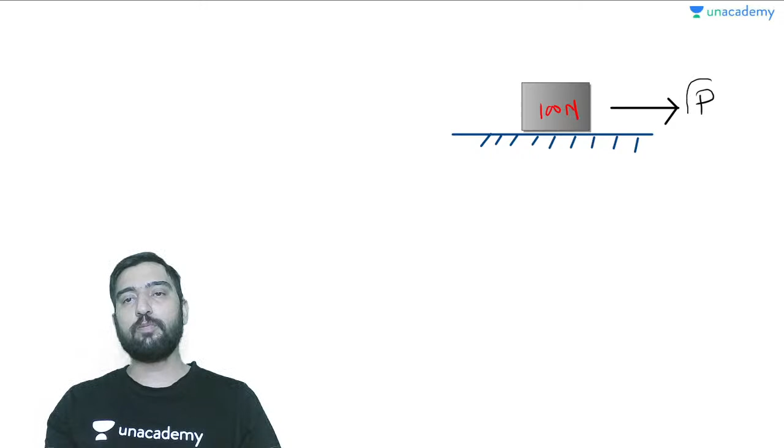Okay, so this force P is a function of two things. One, what is the weight of this block?

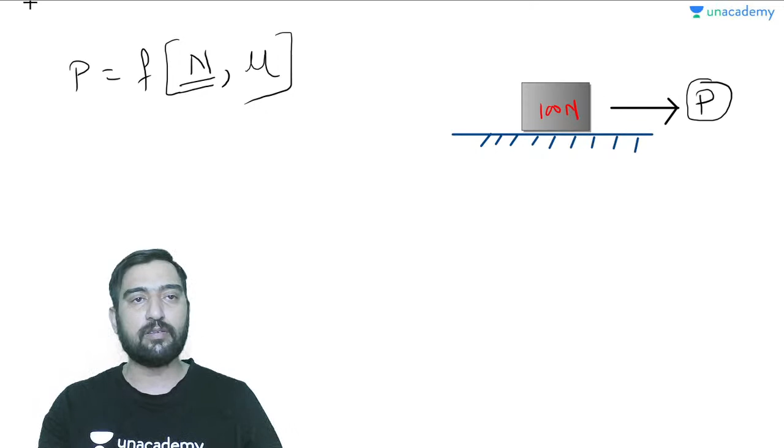So depending upon the type of surface, this P force is also varying. Depending upon the weight of this block, this P force is also affecting. So I can say that force required to move this block is going to depend upon two things. One is the normal force, another is the surface property, which you can say is the coefficient of friction between these surfaces. Is this clear?

It is the coefficient of friction.

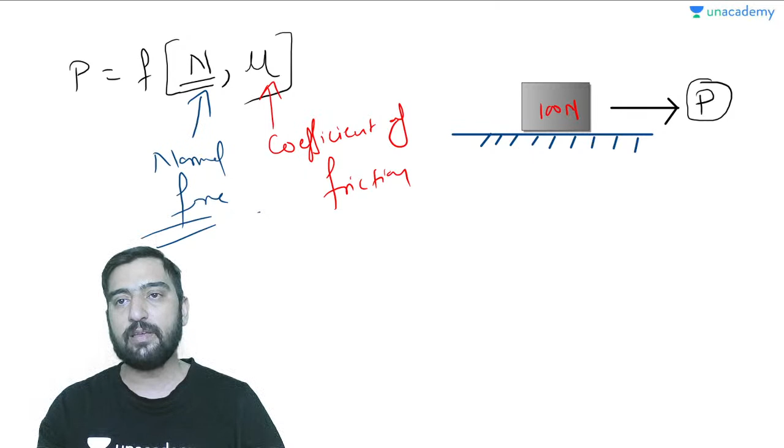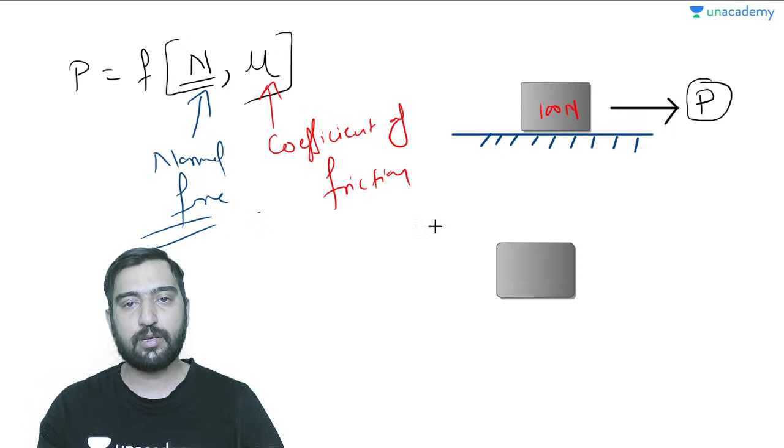Let me draw the free body diagram. Here, let's say this is my block. Okay, so here the weight of this block is 100 Newton. Okay, and a normal force would be acting here. In this case, when the plane is horizontal, the normal force is nothing but equal to the weight of the block. So depending upon this, there would be an equal and opposite force, or you can say there would be a resisting force developing, and that resistant force is the frictional force. And this P is your action force.

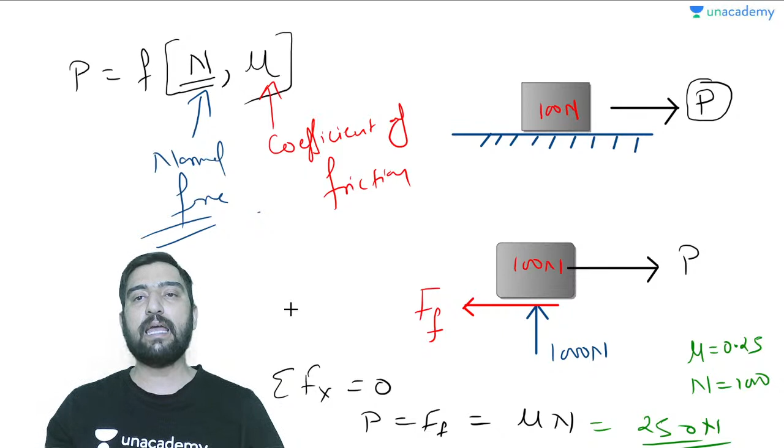The moment you are crossing your load of 250, the relative motion would be established between these two surfaces, or you can say this block would have a tendency to move towards the right due to this applied load P, or with respect to the frame of reference of this block, the ground has the tendency to move towards the left. Whatever force you are applying, corresponding to that force and the weight of this block, there would be some frictional force. The moment you externally overcome this frictional force, only then is this block going to move.

So the similar thing in soil is known as failure. The moment there is a relative motion between a layer of soil, you would say your soil is going to fail in shear, because this is a tangential phenomenon. Here you are applying this force P, and due to this P a frictional force develops along the plane, and with the help of this P you are trying to break this frictional force. So in order to move this block, you are applying a component of force which is going to overcome this tangential force, known as the frictional force.

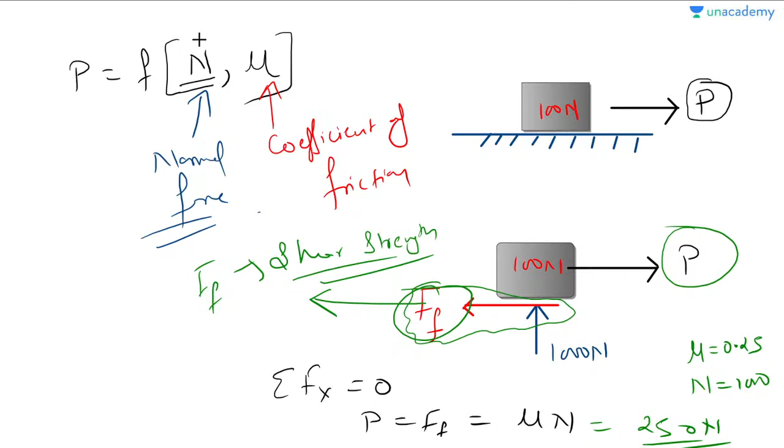And generally when it comes to shear strength within the soil, it is the cohesion, not adhesion, because cohesion is the forces acting on the similar particles. So in our normal rigid body mechanics, in our 11th and 12th class physics, your frictional force depends upon the normal force as well as the coefficient of friction. But here, along with the frictional resistance, interlocking of the particles as well as the cohesion of the soil is also going to play a very crucial role.

Tell me if you guys are having any doubt so far. Tell me for any doubt. Okay now dear, no doubt.

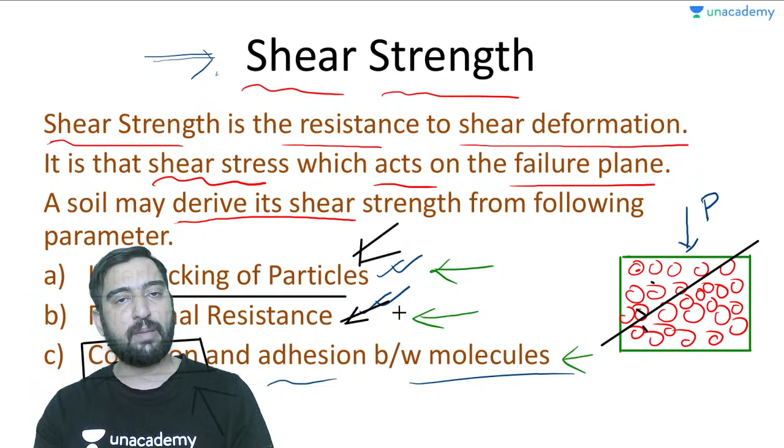So see here, one more thing is there. In soil classification there are broadly two types of soil. One is fine grain soil whose size is less than 75 micron, like silt and clay. And one is coarse grain soil whose size is greater than 75 micron and it varies till 80 mm. So it may be gravels or sand. Sand can further be bifurcated into fine grain sand and coarse grain sand, and similarly gravel can be bifurcated into fine, medium and coarse grain gravel.

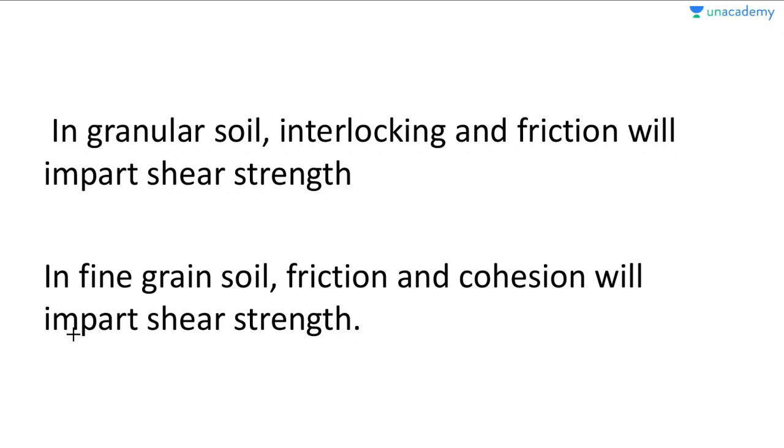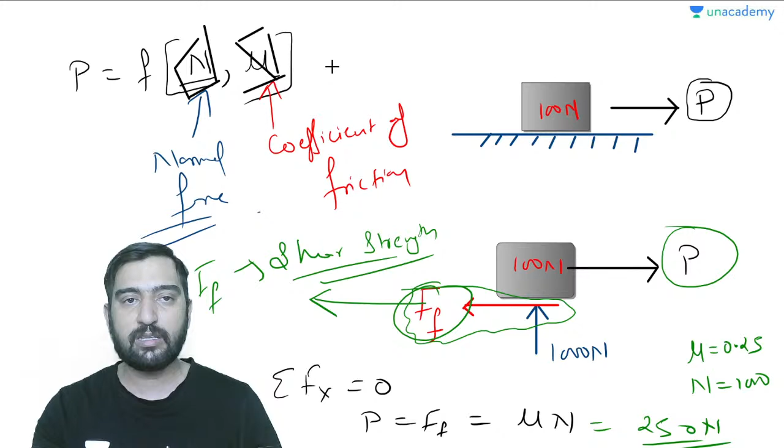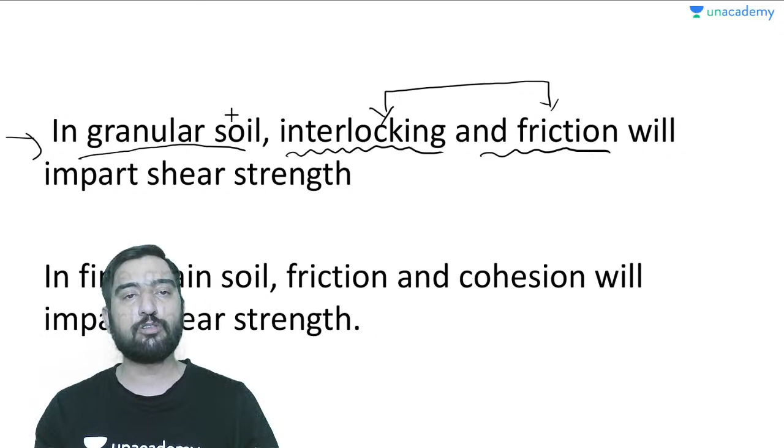Okay, so these three factors also depend upon the type of soil. For example, granular soil is something which has coarse particles within it. In granular soil, the shear strength is achieved due to the interlocking as well as due to the friction. So out of these three reasons, interlocking, friction and cohesion, the first two are responsible for the shear strength in your granular soil, or coarse grain soil.

But when it comes to fine grain soil, that soil whose size is less than 75 micron, your silt or clay, between 2 micron and 75 micron it is silt and less than 2 microns are clay particles. In your fine grain soil, in your clay particles, the major portion of shear strength is due to reason number 2 and reason number 3. Because I told you already, cohesion is significant in fine grain soil, not in coarse grain soil. So once again, out of these reasons, the first two are used for granular soil and the bottom two are used for fine grain soil.

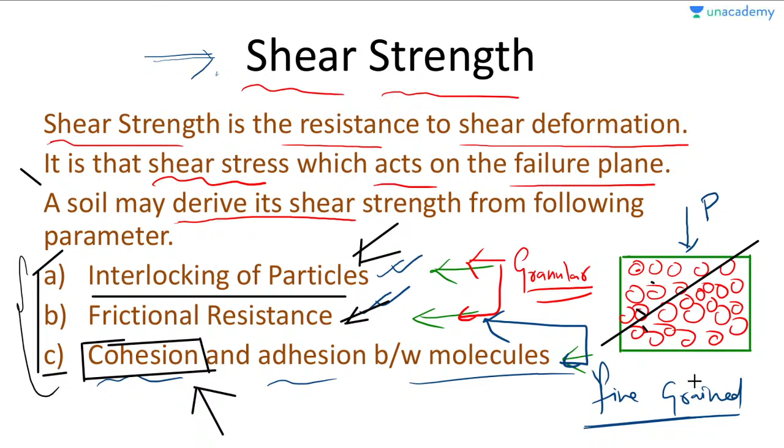This thing can be asked in the objective questions: in coarse grain soil, it is interlocking and friction. In fine grain soil, it is friction as well as cohesion. So indirectly you can say that interlocking and friction are a function of the angle of shear resistance, or phi. And fine grain soil attains its major contribution from cohesion.

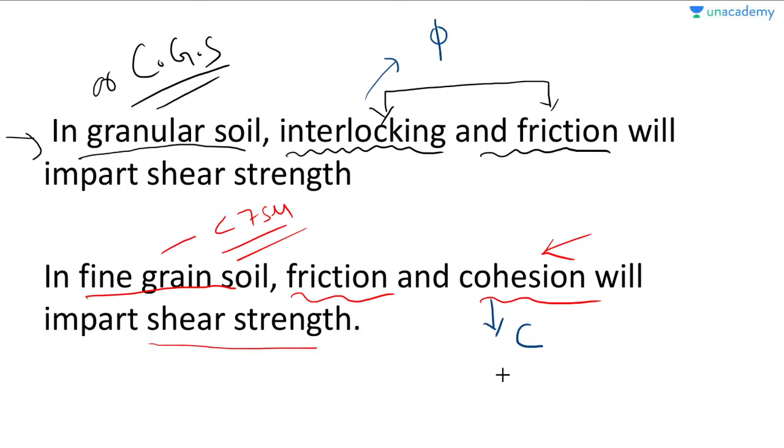Cohesion is basically the forces of attraction between similar molecules, and it generally dominates in fine grain soil where the particle size is very low. Is it clear? Cohesion is taught in fluid mechanics: forces of attraction between the same molecules. Adhesion: forces of attraction between different molecules.

Now you might be thinking, how come adhesion is written here in soil mechanics when the shear strength of a soil sample is to be obtained? Whenever we do ground improvements, we have to do some reinforcement by providing geotextiles and geogrids, etc. So in order to find the shear strength with respect to the geotextile of soil, we use the adhesion factor. That can also be done using the direct shear test.

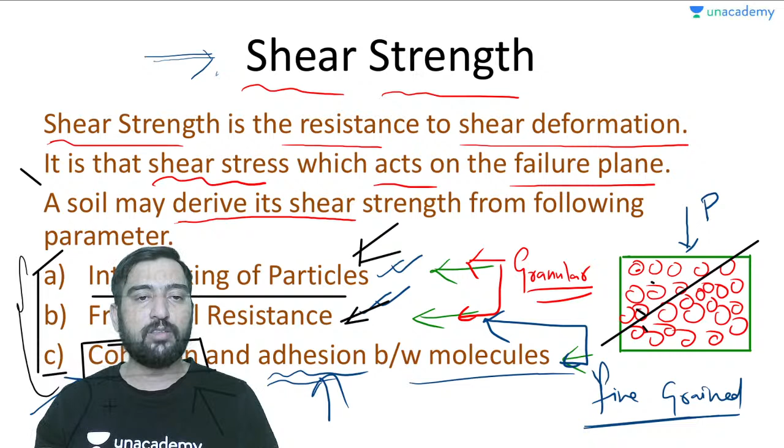I will tell you later that whenever two different interfaces or surfaces are used, adhesion comes into the picture, and whenever it is the same surface, cohesion comes into the picture. So if it is a coarse grain soil, interlocking and friction play a crucial role in shear strength. If it is a fine grain soil, friction and cohesion play a crucial role. Interlocking is a function of the angle of shearing resistance, whereas in fine grain soil, shear strength is basically a function of cohesion.

If the soil is very fine, you call it a C soil. Why? Because all the shear strength is imparted due to cohesion. If it is a coarse grain soil, it is called a phi soil, because all the frictional resistance is achieved with the help of interlocking. If there is an intermediate soil, let's say of size 75 micron to 2, 3 or 4 mm, you call it a general C phi soil.

So how much the soil is able to resist in shear depends upon cohesion as well as the angle of internal friction. That is the reason why this soil is called C phi soil. And why are these two known as shear strength parameters? Because how much shear stress it can resist entirely depends upon these two parameters, known as the C phi parameters or shear strength parameters. That is the concept of C phi.

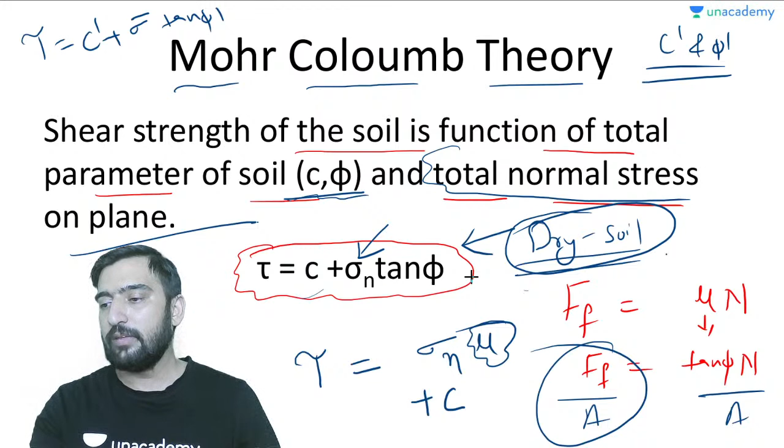But if it is a case of Mohr Coulomb theory, I am not saying it is wrong, because this theory was developed first, but it is only valid for dry soil. Because as long as my soil is dry, it doesn't make any difference whether I use total or effective. Effective and total would be the same in the absence of water, because effective stress only changes whenever there is an interference of water. Is it clear, Shabin? Okay, so this is your modified Mohr Coulomb theory.

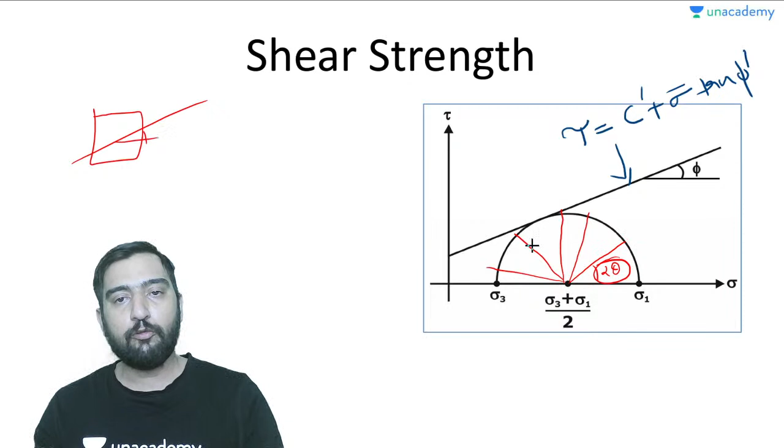So how to find this C and phi? Analytically I am going to explain to you tomorrow, and at the start of the lecture, if anybody tells me, sir, please explain the Mohr circle as well, I am going to explain it. Otherwise I will assume that you have studied it and know the concept, and then I will take care of my geotechnical part. But if you are really not comfortable, you can ask for this Mohr circle. Is it clear to you? So tell me, do you want me to cover the Mohr circle derivations? Okay, fundamentals of Mohr circle tomorrow.

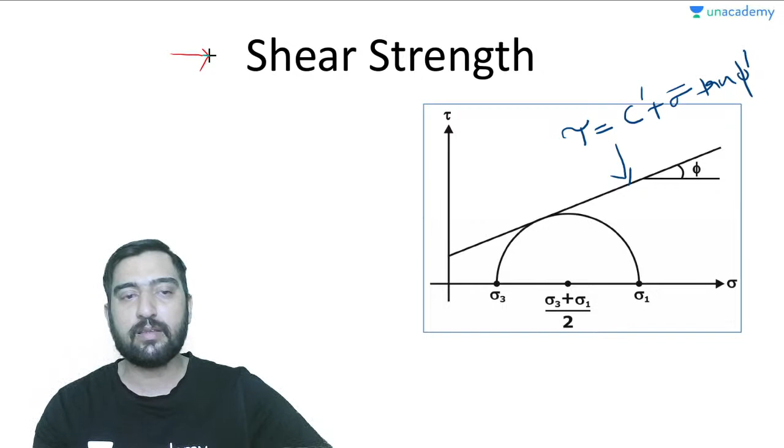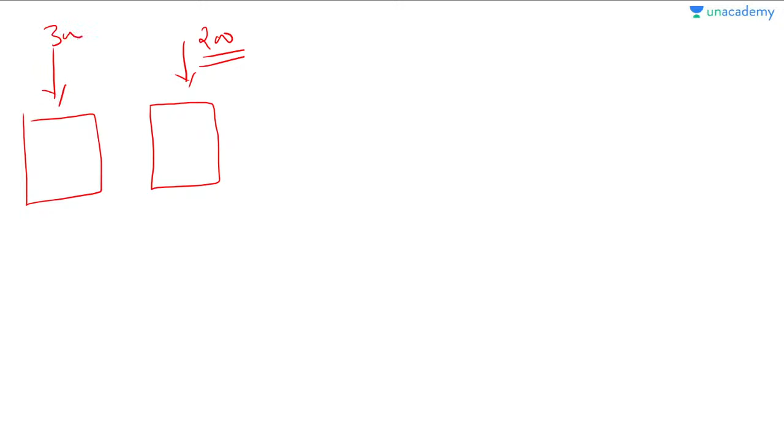Rushikesh, I was telling you that suppose this is my soil sample, and today I am applying a load of, let's say, 200 units over here, but in the past this soil has already been subjected to, let's say, 300. Okay, so today's highest applied load is 200, but in reality it was subjected to 300 maybe in its old history. So right now, how much more I have to apply on my soil such that it can be treated as normally consolidated soil?

Because this soil would be normally consolidated only once the force is going to exceed 300. So this is the difference between the history's maximum applied force or stress with respect to current applied stress. This margin is known as your over consolidation margin. Okay, so that is the thing here.